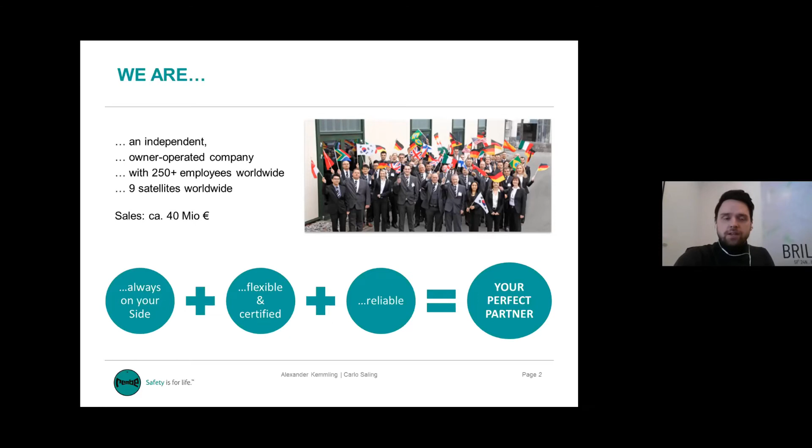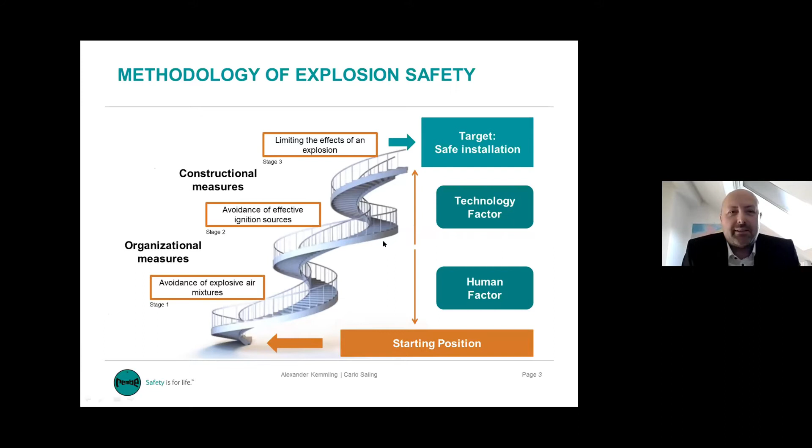Now we will go into the methodology of explosion safety with Carlo. Good morning also from my side. Well, this slide shows a general approach to how to avoid explosions in the industry.

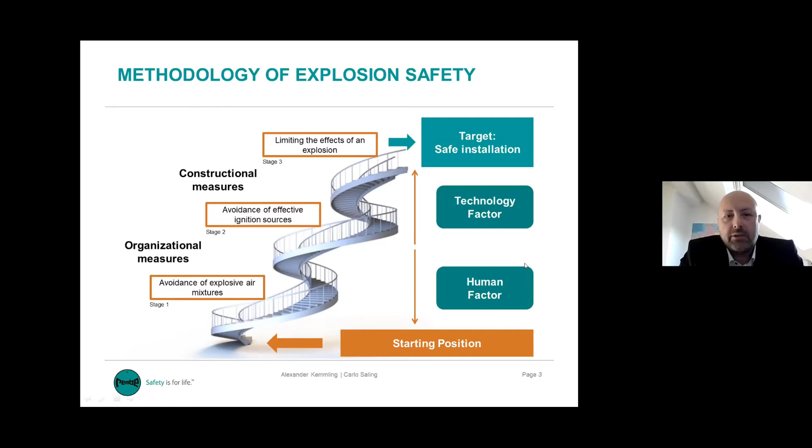The first step is, of course, to avoid explosive atmospheres, for example by substitution of the product, inerting, or ventilation. If not applicable, the second step is to avoid ignition sources. And if explosive atmospheres and ignition sources cannot be eliminated, constructional explosion protection should be installed as a third step. The target of explosion protection is to limit the devastating effects of an explosion to a safe level and to minimize economic loss. Now we will learn more about ignition sources and prevention from Alex.

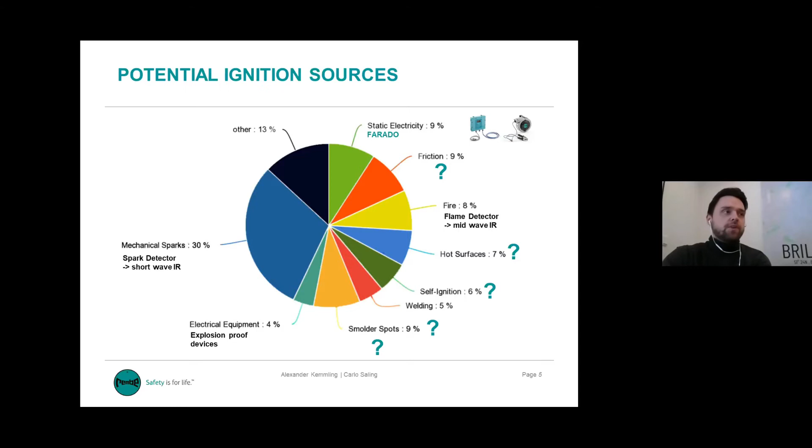For static electricity when filling a silo or unloading a truck, you can use, for example, ground monitoring systems. For the use of electrical equipment in explosion-related areas, we have explosion-proof devices and different certifications. But our question here: in addition to fire, which topic can we cover with flame detection systems? What can we do in case of friction, hot surfaces, self-ignition, maybe also welding and smolder spots? It's also always hard to find the ignition source where everything started.

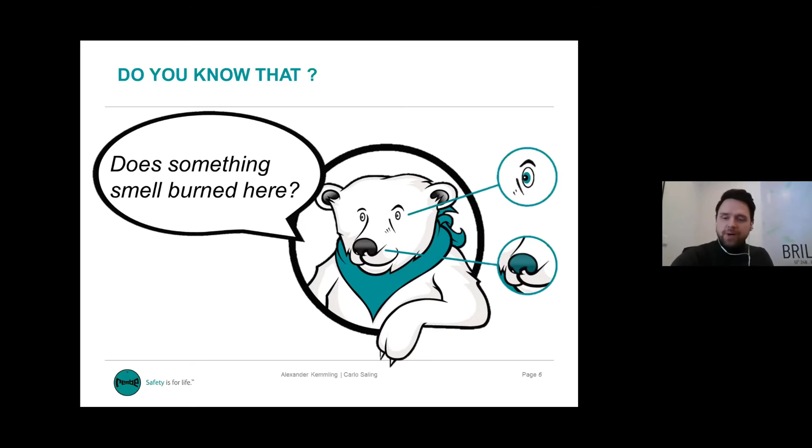So we thought about a very common situation. Everybody should know this: you're standing in the kitchen, currently cooking, and you turn around only for a few seconds. After that, you recognize, and your nose tells you, something smelled burnt here. That's exactly the point. So after that, the visual check with your eyes follows, which means you check if there is smoke or fire. But at exactly that stage of smoldering material, you can't see fire and you can't see smoke.

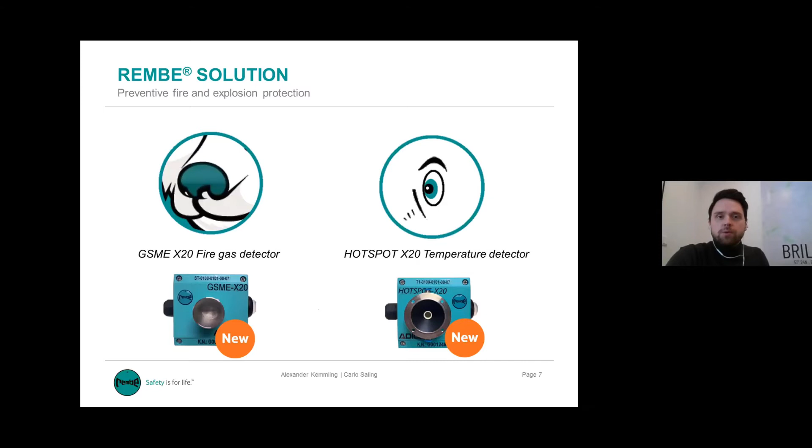But that is exactly the situation we want to take care of. So we work now with some preventive measures, like the GSME X20 fire gas detection and a hotspot temperature detector. Before we go a little bit more into detail on the different applications, a short introduction to both components.

The hotspot is more or less a very compact camera, you can see here on my video, and it is based on long-wave infrared. Long-wave infrared means we are continuously measuring the surface temperature of everything which is inside our field of view. So the benefit here is that we don't only say there is a fire or not. Our evaluation options deliver the possibility that we can say precisely where the hot material currently is.

So our complete field of view is divided into different temperature zones. And for each zone, we can set, for example, a temperature limit, which means when we reach 50 degrees, we will have an alarm depending on a potential free contact or something like that.

Additionally, we can use zone differences, for example, to combine zone A on the lower left side and zone B on the lower right side, and say the maximum allowed temperature difference between these two zones is 20 degrees. So everything which goes above 20 degrees will create an alarm.

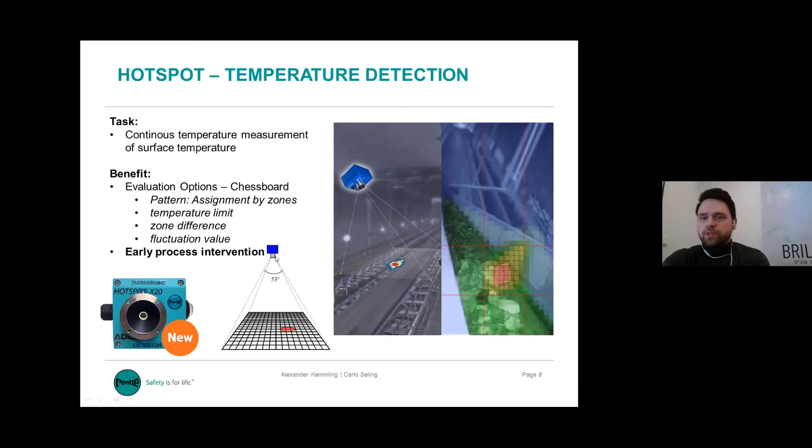And the last possibility of evaluation is using fluctuation values, like when the temperature is increasing or falling too fast in a defined time period. To sum this up, the aim is to allow a very early process intervention if necessary to avoid any bigger damages. In addition to the camera, we also have a very compact gas detection system.

Maybe you know the common ones which focus on CO. We thought that our mission should be that CO is not everything, because every kind of smoldering material also releases different gas types. So to cover all of them, we thought about a very simple solution based on semiconductors to measure carbon monoxide, hydrogen, and a mix of hydrocarbons and nitrogen oxides.

So you can set a maximum concentration limit, for example 50 ppm for CO. When this is reached, you will get an alarm. But you can also do some kind of combination between the different gases, so you can say the requirement for an alarm is to have 50 ppm CO, 10 ppm hydrogen, and another 5 ppm hydrocarbon, for example. So you are more flexible in evaluating how your process is running.

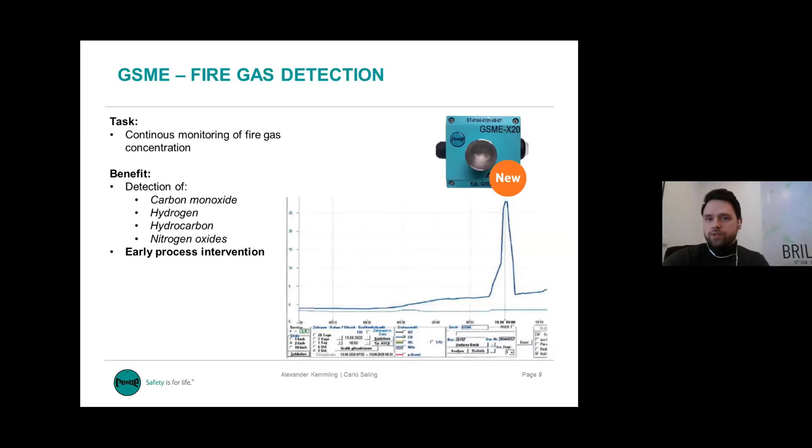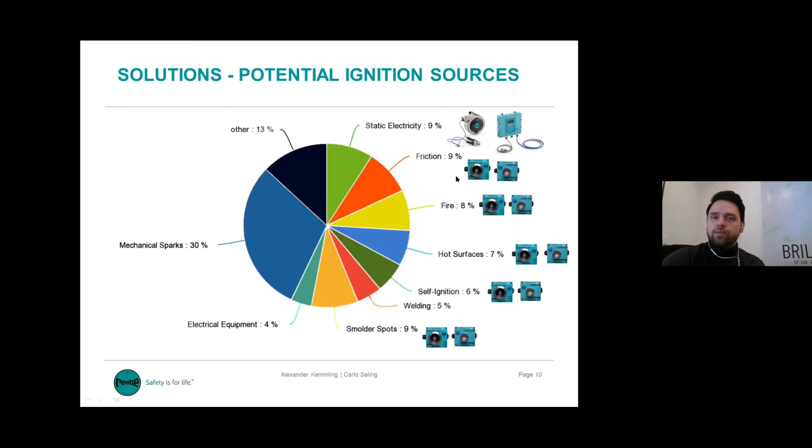So all in all, I would say we had a lot of ignition sources which weren't covered at all. And now we can say everything which starts with a small increase in temperature, like friction or hot surfaces, self-ignition and smoldering spots, or which starts with an increase in gas concentration or creation of fire gases, we can cover with the temperature and gas monitoring systems.

So why you should do that is a very simple point. I would say the sooner, the better. Here we have something like a timeline. We have divided it into 4 different stages.

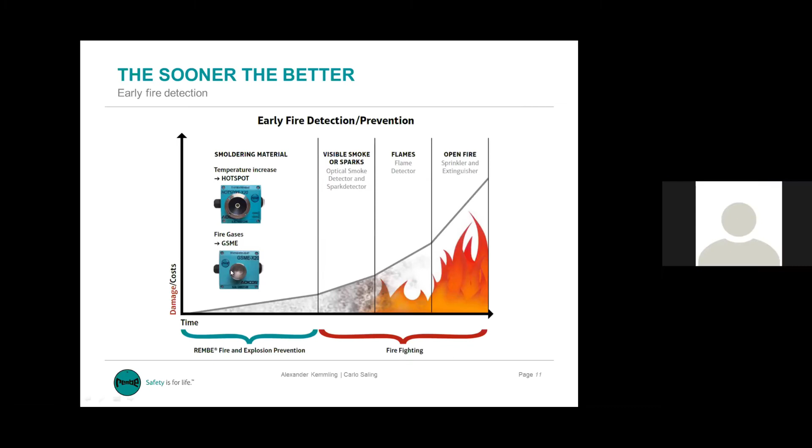So in the first stage, imagine you have smoldering material. Smoldering material leads to an increase in temperature. Additionally, you will have something like a creation of fire gases. So at this stage, you don't have any visible smoke. So you're way early. After that, we have the...

Please mute yourself. I already did it currently.

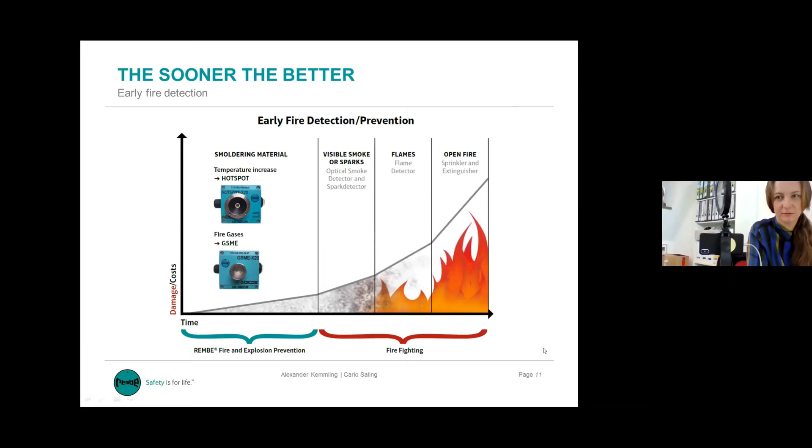Thank you. So after the first stage, the following one is the visible smoke or the sparks, which means you have visible smoke and can detect it with an optical smoke detection system or a spark detection system. After that, flames can be covered by a flame detection system. And your last option in case of a fire is, of course, extinguishing it.

But when we have the possibility to detect temperature increases and fire gases in the early stage of fire and explosion prevention, so in the first stage, we can avoid all the following 3 stages and can therefore save a lot of time and save a lot of money due to avoiding higher damages and higher plant downtimes.

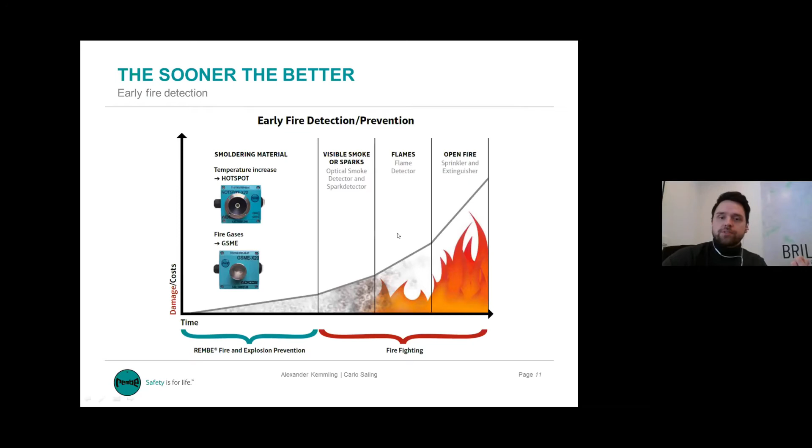So after that short introduction into the topic of explosion prevention, we go over to Carlo to hear something more about explosion protection. Yeah, thank you, Alex, again.

Explosion suppression is often used when we deal with indoor installations with large volumes, as an example, spray dryers, or when you deal with toxic gases or substances. Very important, all of them shall be combined with explosion isolation to avoid propagation in order to minimize the pressures up and downstream. If isolation is not given, it may likely lead to horrible accidents and secondary explosions.

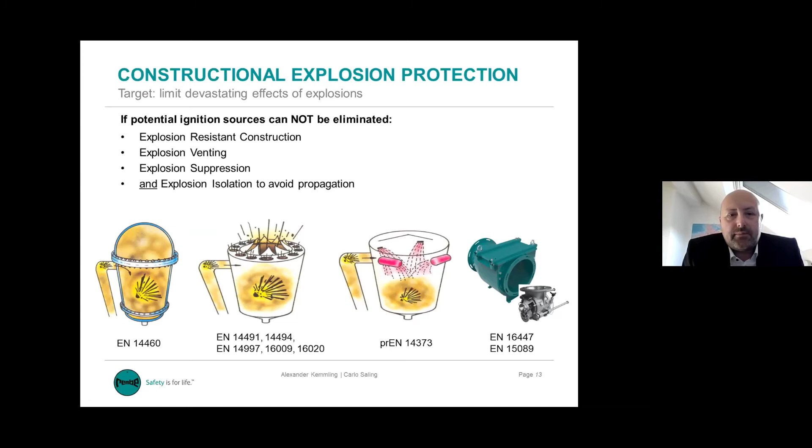Especially, we are on a daily basis very often on site in the plants, especially in older installations, where explosion isolation is often not given. This led to numerous serious accidents in the industry, also in recent years. Now we will show you some safety concepts for typical applications in the industry.

Exactly. So the first one we picked out is the classic silo application. We are on the goods entrance, and the first task is to check what ignition sources can be risky in this situation and what needs to be done to prevent them, or more or less what needs to be done to use explosion protection as an airbag in the last case.

So we are starting with our ground monitoring system at the goods entrance for grounding the truck to avoid electrostatic discharges, which can lead to ignition of the dusty cloud inside of the silo, for example.

Depending on how the material goes into the silo, we can also check the surface temperature of the material inside the silo with our camera, as it is certified for use in zone 20 and zone 0.

Additionally, to have a good overview and good monitoring, we also use the GSME X20 fire gas detection to see if there is any increase in CO, carbon, hydrogen and hydrocarbon, for example.

The last option is, of course, not only to check if hot material is going inside a critical zone, but also coming out of a critical zone, which could create a new potential ignition source for the next stage. So we also check the temperature from the outside with our camera. When there's a smoldering ember inside the lower part of the silo cone, the temperature gets transported quite easily to the outer wall, where we can detect it at an early stage.

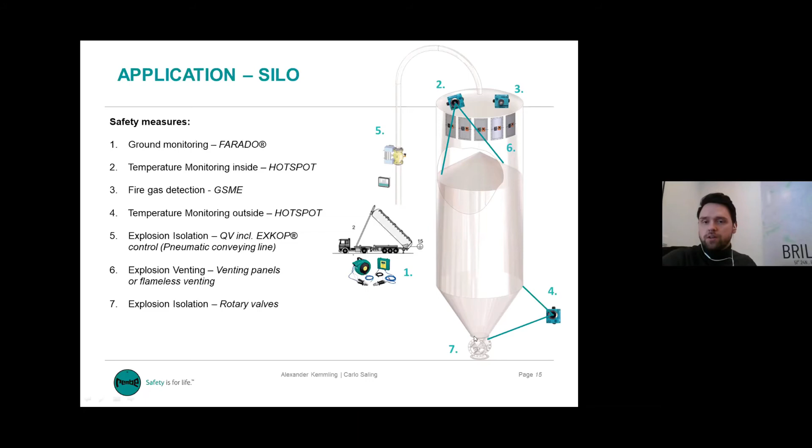Most silos in the industry are protected by explosion venting because of their volume, always in combination with explosion isolation. Here, the pneumatic filling line is isolated by a quench valve in order to avoid any pressure shock in the direction of the truck. And the explosion isolation of the material outlet is provided by a rotary valve.

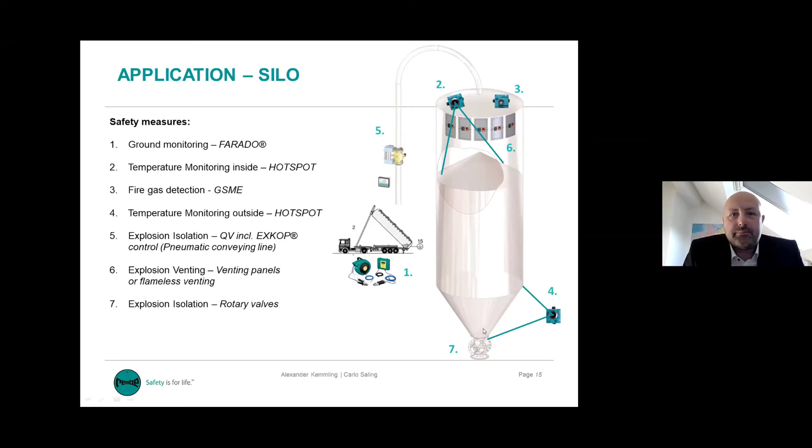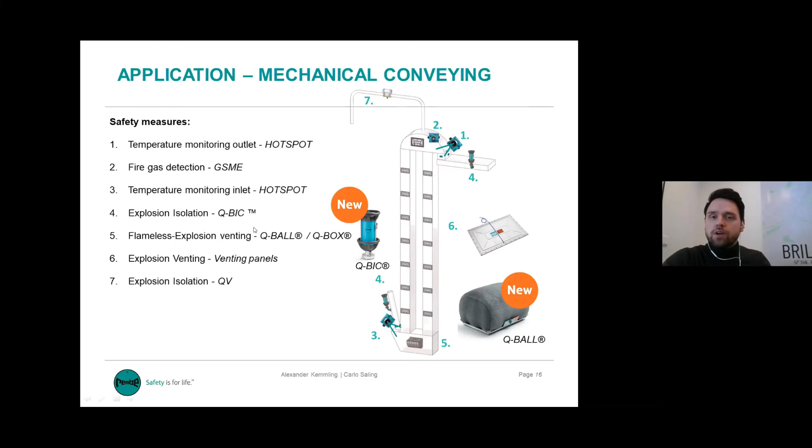Most conveyors are protected by explosion venting as well. One reason is, of course, the low design strength. And last year, we launched a new product, the Q-Ball.

This Q-Ball is a flameless venting device dedicated for mechanical conveyors like the illustrated bucket elevators or chain conveyors. The advantage of this product is its compact design, which allows operators easy retrofitting of existing installations in order to minimize safety areas.

Explosion isolation here in this illustration of the material inlet and duct outlet is provided by our Q-BIC system. This is a chemical barrier system, and isolation of the aspiration line to the dust collector is provided by a quench valve. Both systems, Q-BIC and QV, are able to isolate explosions in both directions.

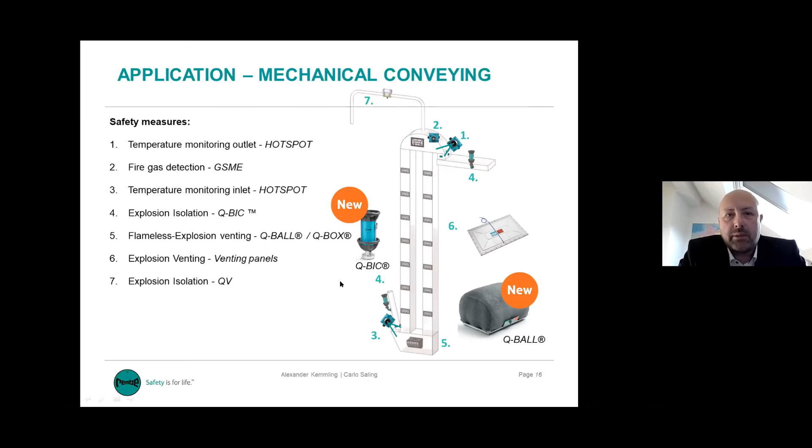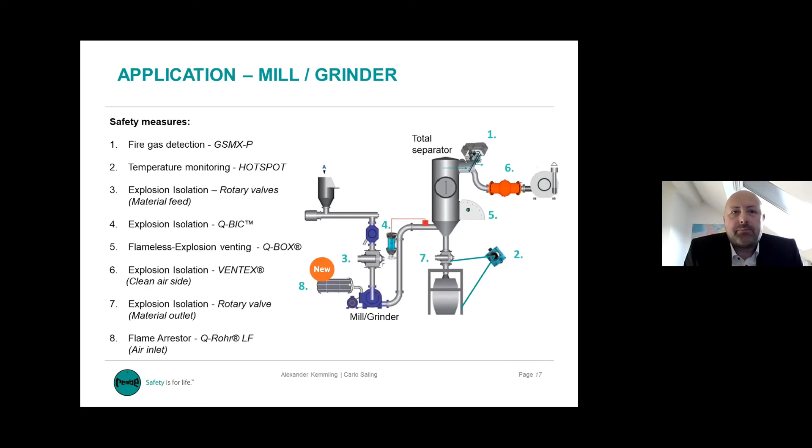Last year, we also designed some new flame arresters, applicable for these kinds of applications, to be installed in the air inlet or ventilation slots of the grinder or the mill, in order to protect the workers against flash fires caused by an explosion.

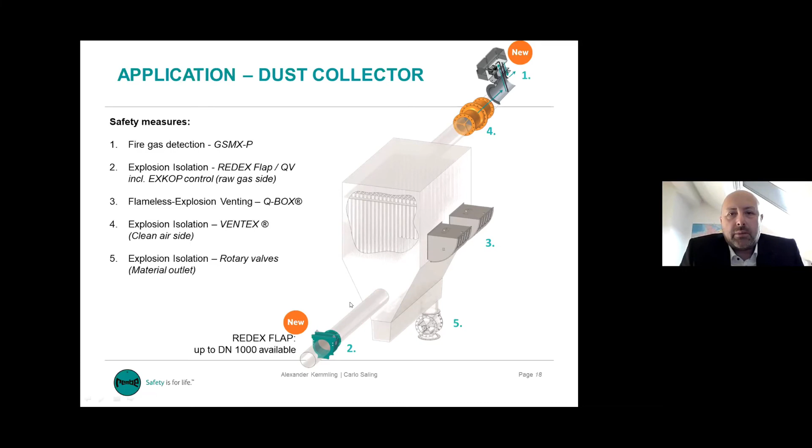This is, for prevention, the most suitable measure. And therefore, exactly in the filter system, we are focusing on the constructional measures again. Explosion protection of dust collectors varies from industry and application. All of these options are seen in the industry: pressure shock resistant design, suppression, venting.

To specify the explosion isolation in the raw gas, it is necessary to distinguish between aspiration filters and total separators because of different dust loading. For aspiration filters, we recommend the Redex flap, a flap valve. For total separators, we recommend the Q-BIC chemical barrier system, or the quench valve, because of the higher mass flow and lower pressure drops. Also for retrofitting, sometimes it's better to have a quench valve instead of a flap because of the high pressure drops.

The clean air side here is protected by a Ventex valve. This is especially necessary when you consider recirculating the air to minimize energy costs. If you have just ambient air, normally there is no explosion isolation given.

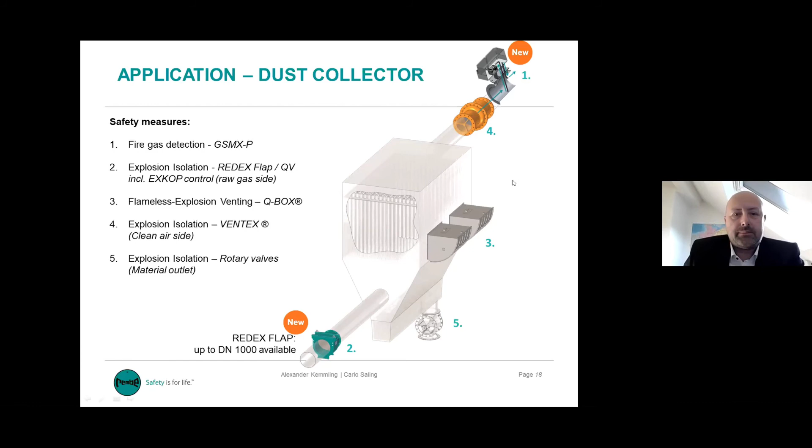Okay, the time is running. Exactly, that's nearly the last slide.

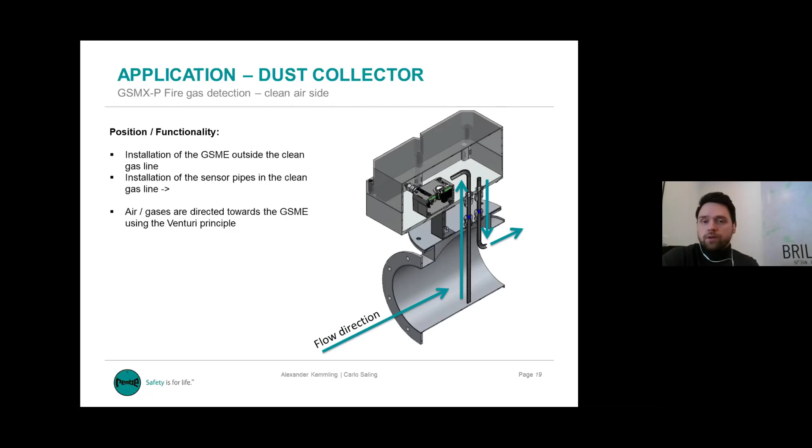Okay, so we are through, and we are looking forward to your questions.

11:10, perfect. Thank you, Alex and Carlo, for the presentation. And you mentioned also mechanical conveying, which is very interesting for us. To the audience, I'm from the German Bulk and Powder Association, and our focus is on equipment for the bulk and powder industry, and our topics include processing and also explosion protection, but not so deep as maybe in other associations. But we are working on it, and thanks again.

I have the first questions from the chat, but I have a question first because you mentioned the sensors, infrared sensors and hotspot detection. So these sensors, how sensitive are they? And do you collect the data to bring them into the cloud, then maybe use it for surveying or other purposes? That's a very good question to demonstrate a little bit the accuracy of such detections.

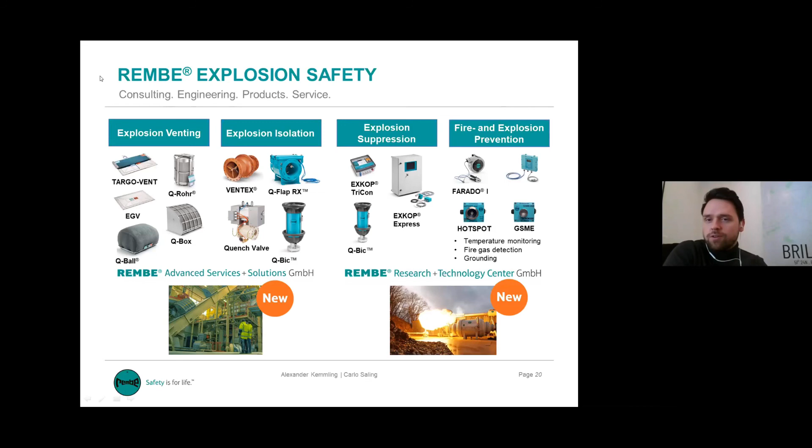I think more or less this covers all your questions, Jochen. Am I right? Yeah, okay. There are two more questions, and I guess we have time for it. The first is from Max Petri - please open your mic and ask directly, Carlo or Alex.

Hello, I'm a student and I'm interested in explosion protection in the explosion protection industry, and I just saw on the website, I think it was one month ago, that the Q-Bic was not available, but some time ago it was available. So I was wondering if it is now available or what is the current status of it.

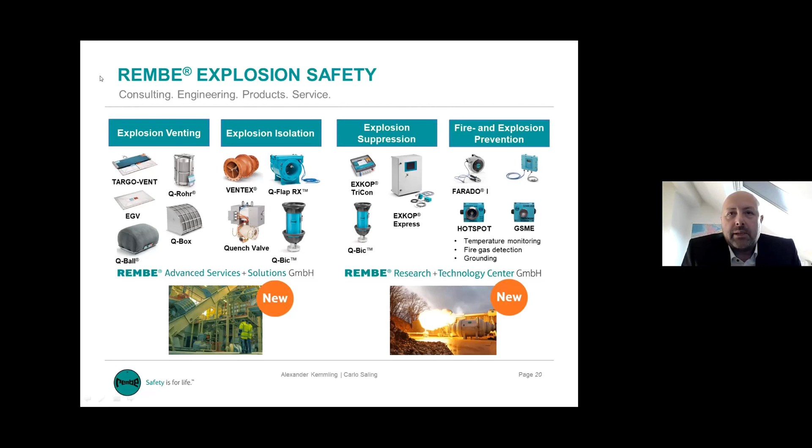Well, the Q-Bic is available. We sold a lot of devices already and installed them worldwide. So feel free to place the order. It was a development which took a few years. Some years ago, we worked closely together with IEP, the manufacturer of a suppression system, but they canceled the partnership with us. So it was the decision of our management to develop our own design, and now it is available - not for suppression, not for large volumes, but as a chemical barrier system for smaller volumes. Definitely, yes. Okay, thank you. You're welcome.